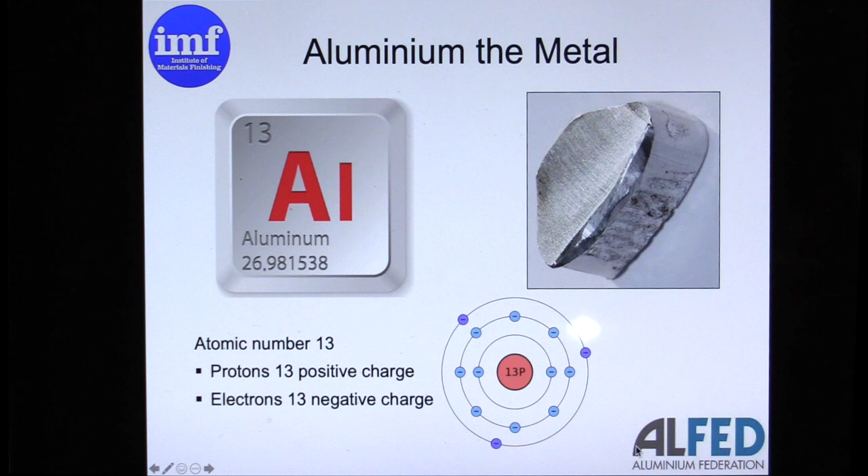It's a strategic metal, and in society, effectively, we've got 5 strategic metals. Steel is obviously dominant. Titanium is overlooked, but titanium is a strategic metal because it is used extensively in surgery, because bone grows into titanium. So you might think in terms of titanium in aerospace and things like that, but where it really is gaining ground is in medical. Copper, bullets, brass. Magnesium is the lightest metal of them all, and you find it in applications like car roofs, displacing carbon fibre. But the star that I'm going to talk about is aluminium.

And the point that I'm going to pick out very quickly: effectively aluminium is always a third of steel. It's a third of the density of steel, a third of the mechanical strength of steel, a third of the melting point of steel. Melting point 660, very low temperature. Very high conductivity. Very roughly, the conductivity of aluminium is about half that of copper in terms of electricity and in terms of thermal conductivity.

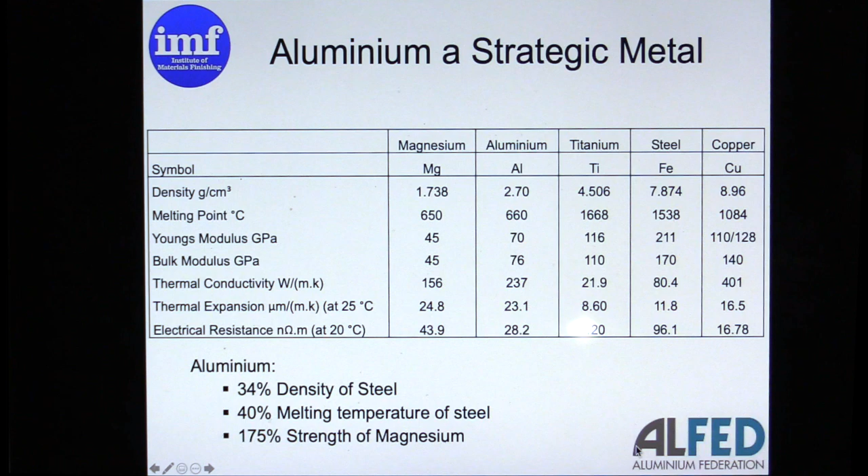These days, aluminium alloys are being developed to match, if you talk in terms of a car chassis, or in architectural terms, there are now aluminium grades that match steel strength for strength. The high tensile steels obviously leave aluminium behind, but for the vast majority of uses, about 85% of what you can do with steel, you can now do with aluminium. A third of the weight.

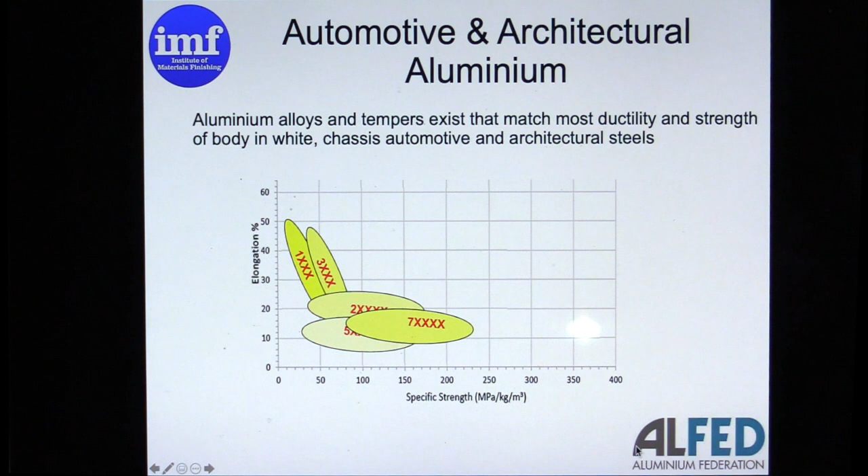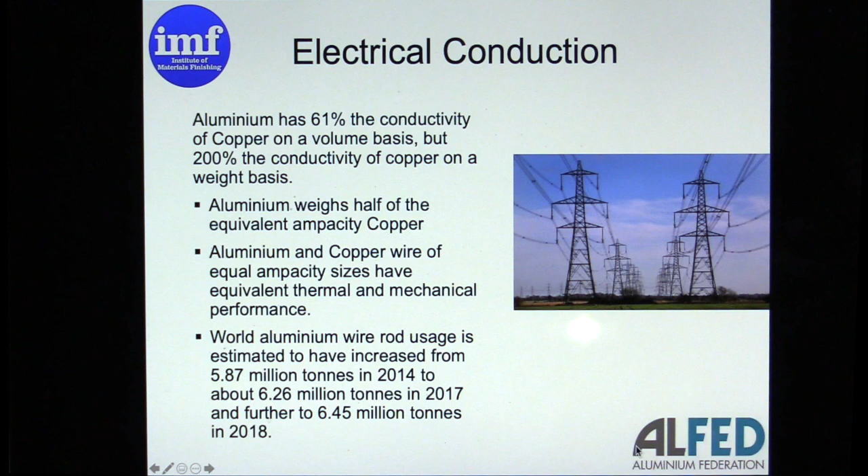In terms of electrical conductivity, it's displacing copper. Very roughly, it's a third of the weight of copper, but because of its high conductivity, on a weight for weight basis, it's 200% the conductivity of copper. So in a Jag, you're going to take 12 kilograms of weight out by going from copper to aluminium wiring. The 11 kV and 100,000 volt cables are swapping to aluminium. Frequently, they put a high tensile steel wire down the middle of them. But by doing that, you can spread out your pylons. Huge investment in that.

Cookware: again, on a weight for weight basis, its thermal conductivity is 200% that of copper. You don't see many copper pots and pans. If you've been watching The Great Bake Off, each chef is issued with a complete identical set of pots and pans. They're handmade in Birmingham. The patterns are about 100 years old. They use a 120-year-old press, and they turn them on a lathe which is 80 years old.

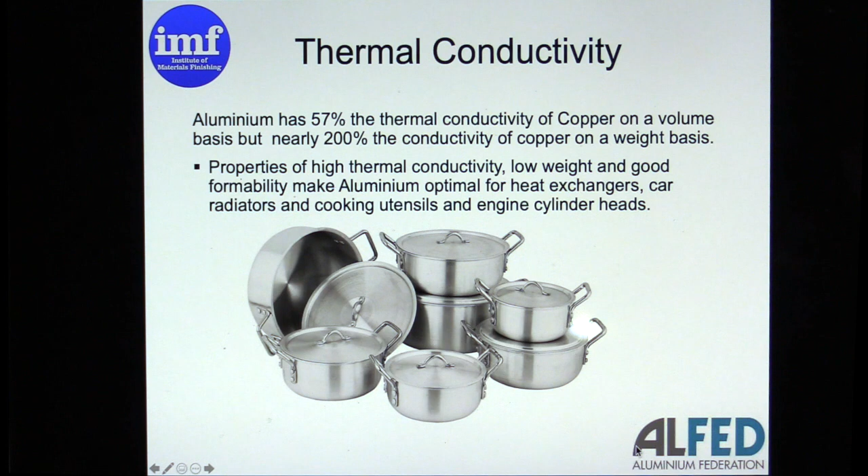One of the properties of aluminium which is gaining a huge amount of interest is, unlike other metals, it actually gets stronger as it gets colder. No brittle ductile transition. But the important thing is its ductility remains. Even metals that don't have brittle ductile transitions start to lose ductility at low temperatures. Aluminium retains its ductility at low temperatures. Huge applications in cryogenics and in outer space for that reason.

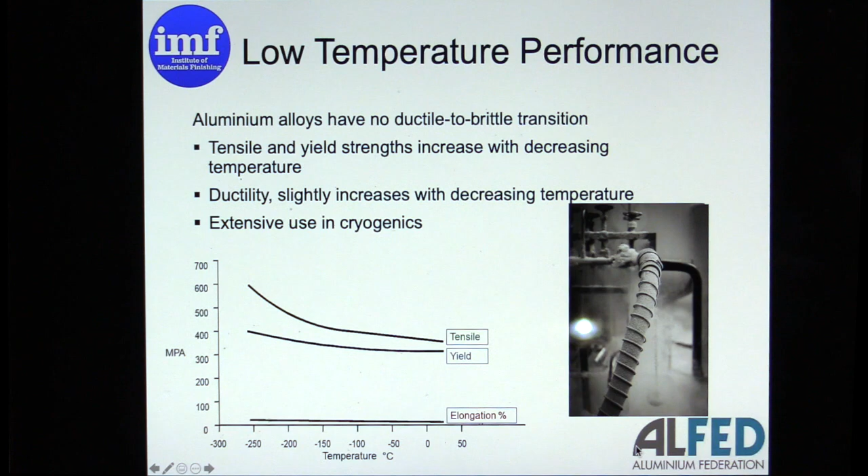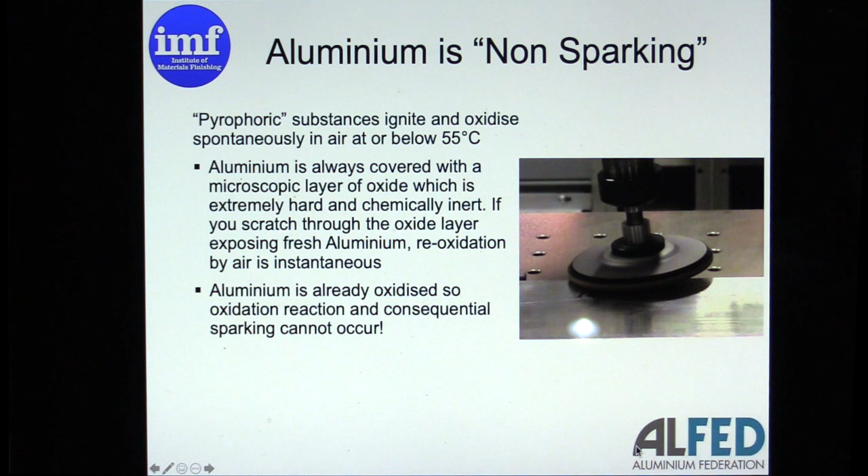It's non-magnetic. Big application, non-magnetic. It does conduct electricity, so through eddy currents you can induce magnetism, but in its natural state it's not magnetic. It's non-sparking. One of the beauties of aluminium is it instantly forms an oxide coat on its surface. When a spark's generated, effectively what you're doing is burning the metal to an oxide. But aluminium instantly forms an oxide, so it's non-sparking. It doesn't burn either.

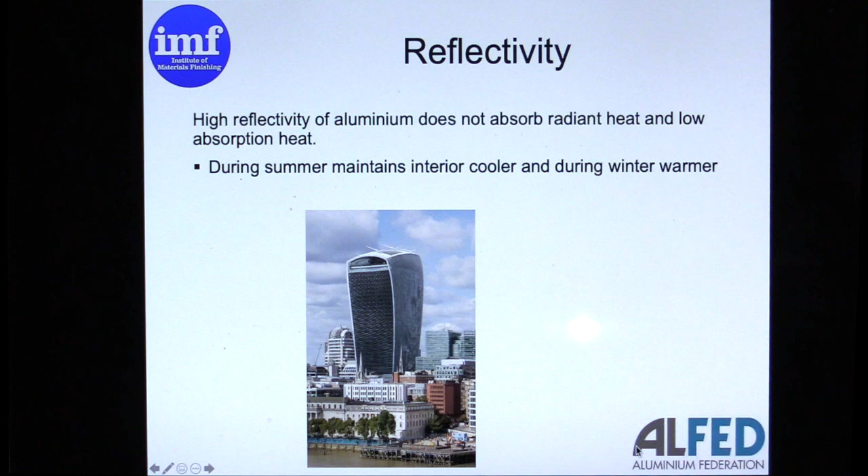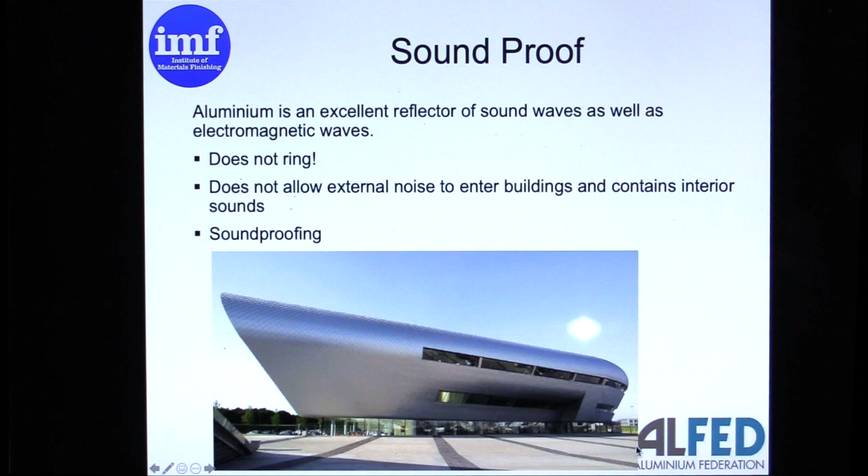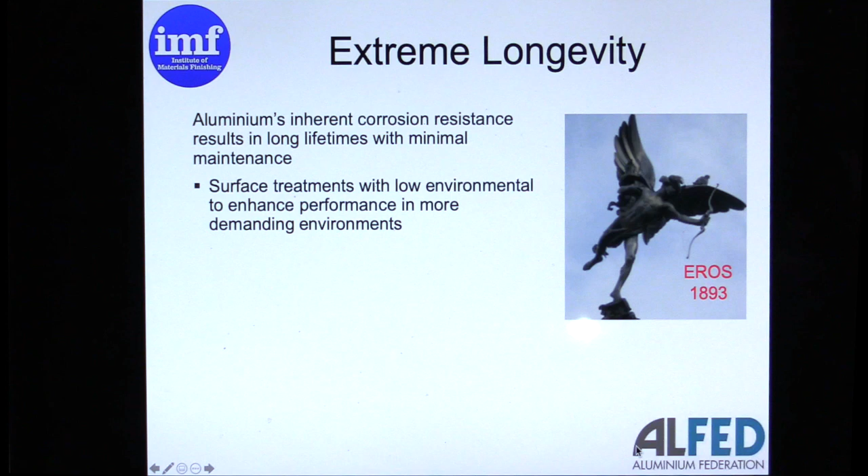Oops. Extreme longevity. Eros, 1893, standing on the pedestal. No protection whatsoever. It's actually 16 castings riveted together. It's been taken down twice in its history and cleaned. It's as good as new. If aluminium is subjected to regular rain and not constantly damp, it's got incredible corrosion resistant properties.

Get it right. So let's see why, I've outlined the properties. Demand for aluminium is going balmy. And I'm going to throw some numbers at you to show what's going on. And the thing to look at is the countries. Bear in mind that aluminium weighs a third of the weight of steel. So steel production is about 1 billion tonnes a year.

Primary aluminium, this is aluminium out of ground into first use. Year 2000, about 25 million tonnes were produced. 2017, 63 million tonnes. They argue over the exact number, but it's got a 6 in front of it. Third of the weight of steel. Look at China and look at the Gulf states.

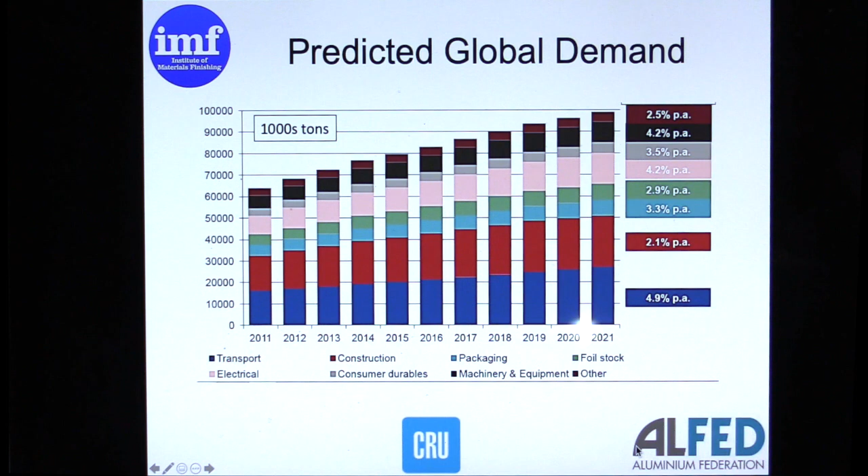Where's its uses? Two massive uses of aluminium. The one is construction, buildings, and if you looked across there, you would see virtually every high-rise building out there is clad in aluminium. So the weatherproofing, the facades are all aluminium. The other great one is transport. So today, transport and architecture are the two big demands for aluminium. But the one that's coming up very rapidly in the background is packaging. With the scare of plastics, people are swapping from plastics to aluminium foil for packaging. And that can be recycled.

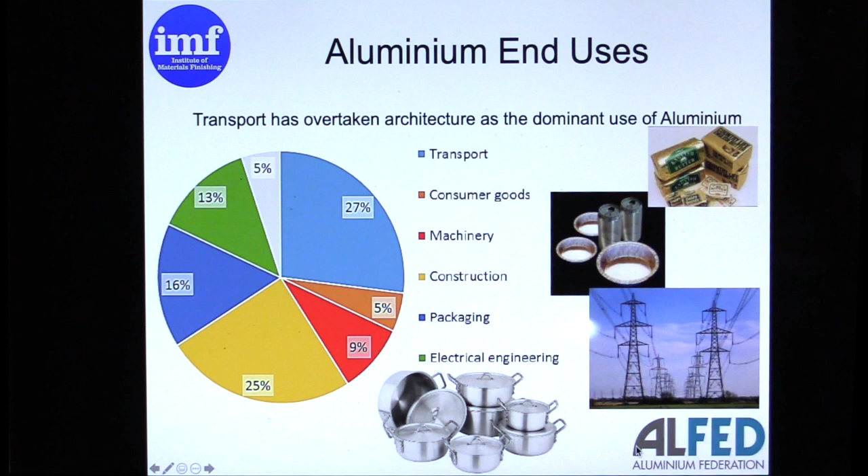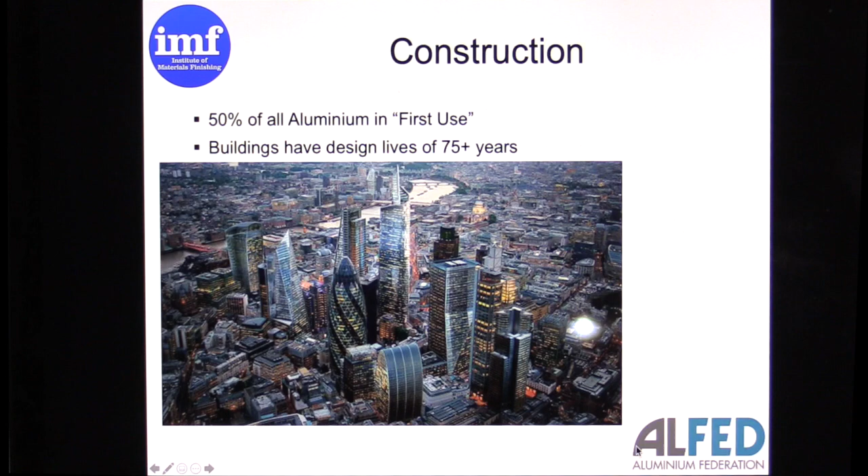Traditionally, aluminium went into buildings. They have a design life of 75 years. Which means that 50% of all aluminium ever dug out of the ground is still in its first use. Automotive demand, rapidly coming out. The Tesla, there are 2 steel parts in a Tesla. The rest is aluminium. The highest safety rating car in the world.

Jag, Audi, the F-150, sports utility vehicle in the States, the largest selling car in the world. They swapped to aluminium and took 150 kilograms out of it. It's in America, they don't have boy racers. If you're an affluent middle class sort of teenager, you've got to have one of these. Biggest selling car in the world. Trucks. Using extrusions and extruded panels, make it shorter, longer, change the shape without fundamentally changing the design, down to aluminium.

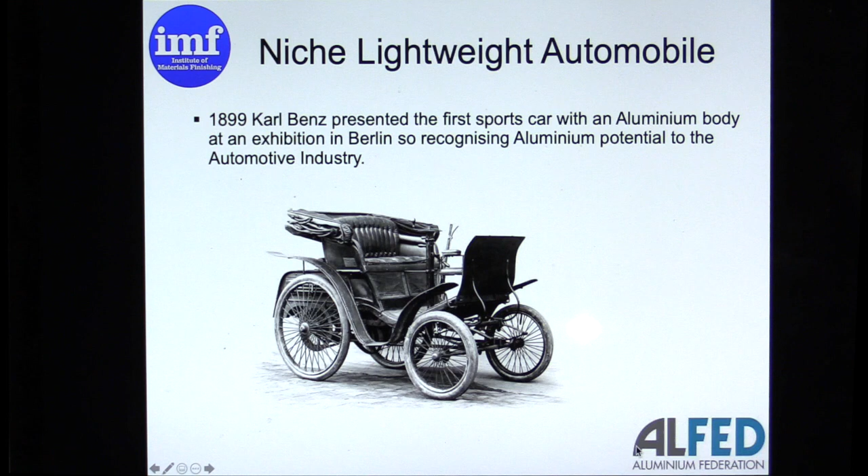The first niche lightweight vehicle in the world. 1899, Karl Benz. The first aluminium-bodied vehicle, sports car in the world. Aluminium in vehicles is increasing. Very steady growth. The net effect of that is the End-of-Life Vehicles Directive says that 85% of all raw materials have to be recycled back into their own original state. So when you take out rubber and some of the chemicals and the stuff, basically they mean steel and aluminium.

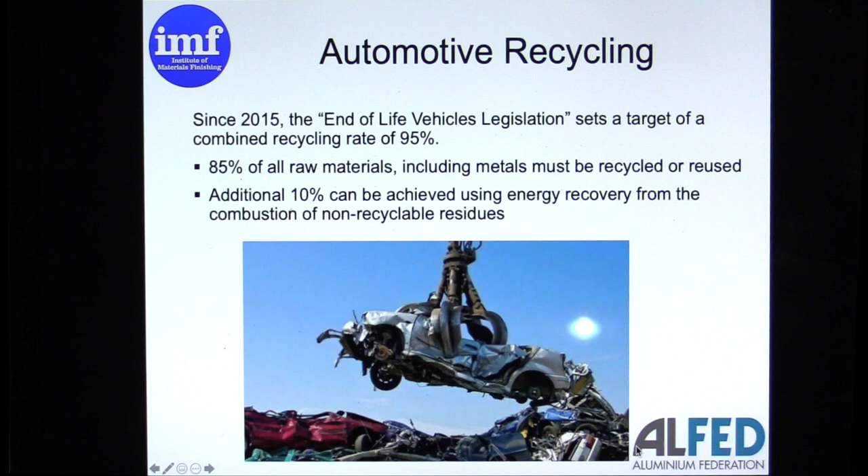Automotive is driving recycling. A car's designed for 100,000 miles, 15-year life. 100,000 miles is revving in the red, 120 miles an hour and stop starts. But that's the life of a car. So aluminium service lives, this is sort of building it. 75 years for a building, design life. Aircraft, 30 years. So the aircraft of the late 70s, which are extensively aluminium, are now being scrapped and dismantled. Power transmission cables, 35 years. They are going up as we speak.